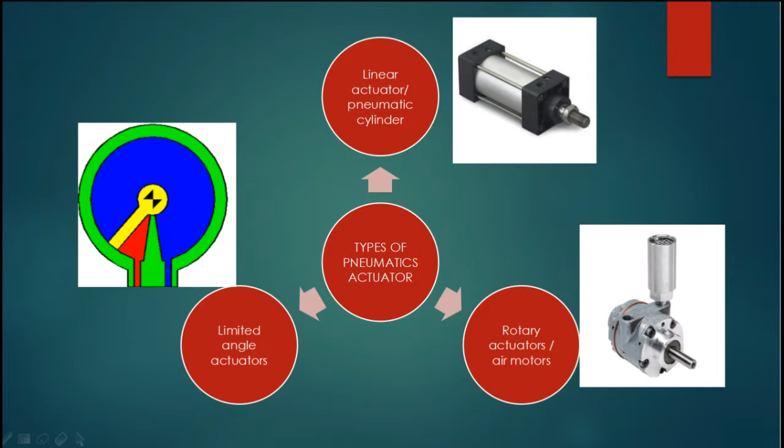Pneumatic actuators are devices used for converting pressure energy of compressed air into mechanical energy to perform useful work.

Type: linear actuator or pneumatic cylinder, based on first application. Number 1, light duty air cylinder. Number 2, medium duty air cylinder. Number 3, heavy duty air cylinder.

Second, cylinder action: number 1, single acting cylinder; number 2, double acting cylinder. Third, cylinder movement: number 1, rotating type air cylinder; number 2, non-rotating type air cylinder.

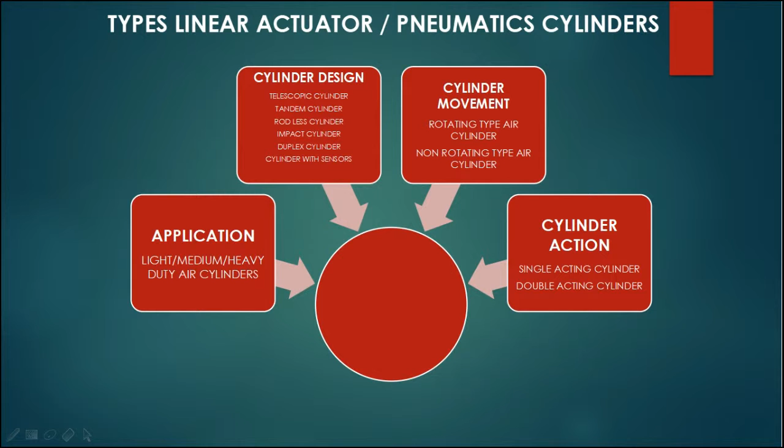And the last one, cylinder design: number 1, telescopic cylinder; number 2, tandem cylinder; number 3, rodless cylinder; number 4, impact cylinder; number 5, duplex cylinder; and the last one, cylinder with sensor.

Material of construction, type of cylinder: number 1, light duty; number 2, medium duty; number 3, heavy duty. Components.

Number 1, cylinder tube. Number 2, piston. Number 3, mounting brackets. Light duty for cylinder tube: hard drawn seamless aluminium or brass tube, plastic.

Medium duty for cylinder tube: hard drawn seamless brass tube, aluminium, brass, iron or steel casting. Heavy duty for cylinder tube: hard drawn seamless tubing, brass, bronze, iron or steel casting.

Light duty for piston: aluminium alloy casting, fabricated aluminium, brass, bronze. Medium duty for piston: aluminium alloy casting, brass, cast iron.

Heavy duty for piston: aluminium alloy casting, brass, cast iron.

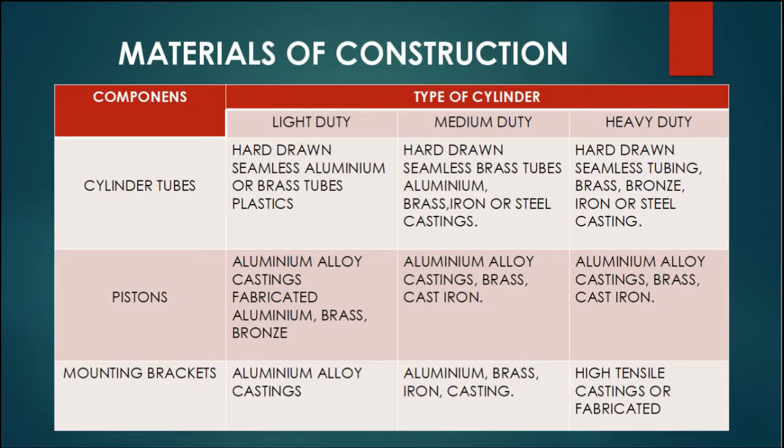Light duty for mounting brackets: aluminium alloy casting. Medium duty for mounting brackets: aluminium, brass, iron casting. Heavy duty for mounting brackets: high tensile casting or fabricated.

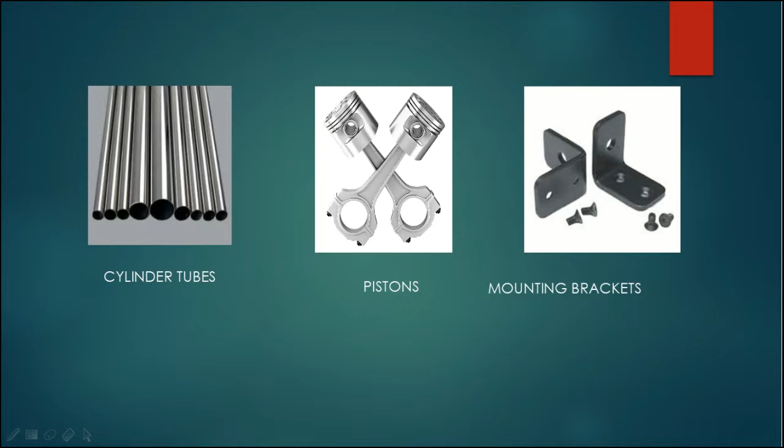Cylinder tube, piston, mounting bracket. Single acting cylinder.

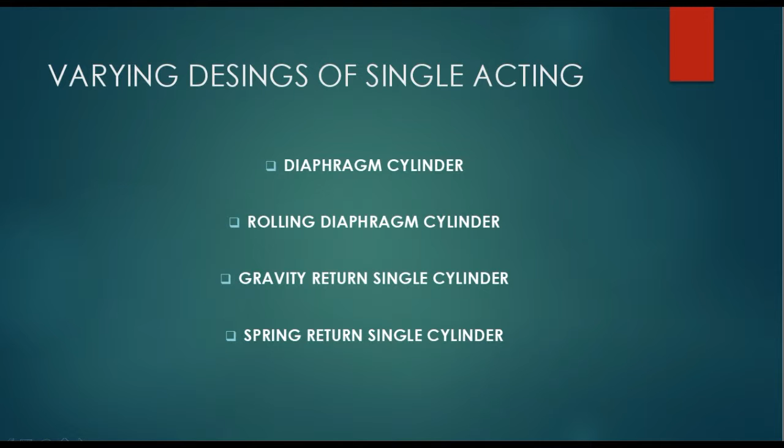Variant designs of single acting cylinder: first, diaphragm cylinder; second, rolling diaphragm cylinder; third, gravity return single cylinder; and the last one, spring return single cylinder.

Double acting cylinder is equipped with two working ports, on the piston side and the rod side. To extend the piston, compressed air is admitted on the piston side and the rod side is connected to the exhaust.

During retraction, air is admitted at the rod side while the piston side volume is connected to the exhaust. Force is exerted by the piston both during forward and return motion of the cylinder. It's available from few mm to around 300 mm, while stroke length up to 2 meters.

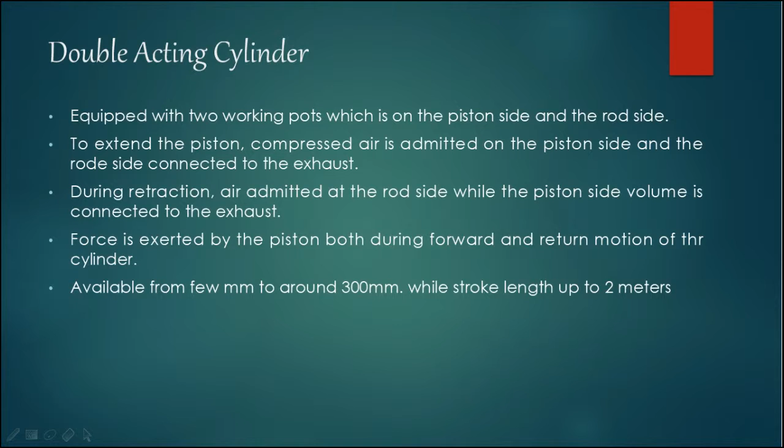Now, the construction of double acting cylinder. The 7 parts of the double acting cylinder are: first, base cap with the port connection; second, bearing cap with port connection; third, cylinder barrel; fourth, piston; fifth, piston rod; sixth, scraper ring.

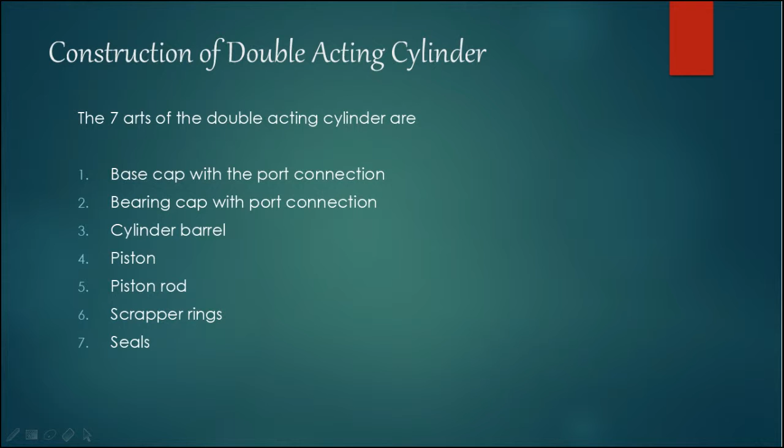And seventh, seals. The base cap and the bearing cap are made of cast material, aluminium or malleable cast iron, and can be fastened to the cylinder barrel by tie rods, threads or flange. The cylinder barrel is usually made of seamless drawn steel tube to increase the life of the sealing component.

The bearing surfaces of the cylinder are precision machined. Can be made of aluminium, brass or steel tube with hard chrome bearing surface. These are used where there is corrosive influence.

Piston rod made from heat-treated steel. Certain percentage of chrome protects against rusting. Seal provided between piston and barrel to avoid leakage. Sealing ring is fitted in the bearing cap to seal the piston rod. Bearing bush made from sintered bronze or plastic coated metal.

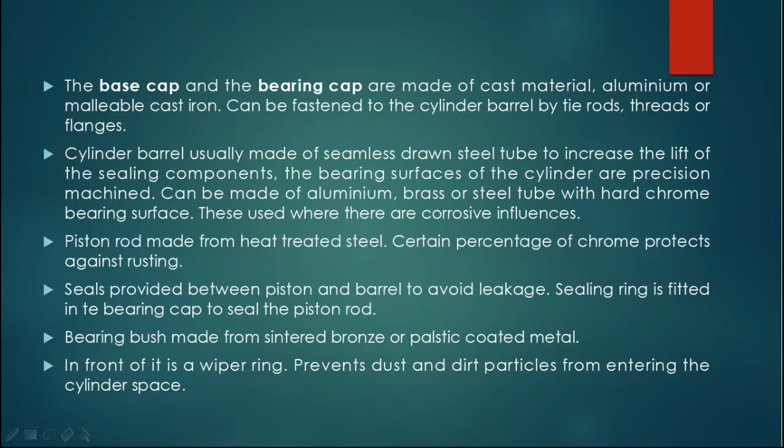In front of it is a wiper ring, which prevents dust and dirt particles from entering the cylinder space.

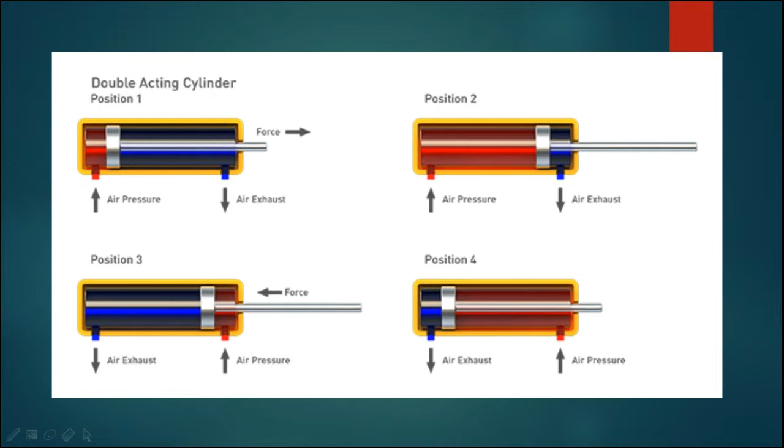Double acting cylinder with piston rod on one side. To extend the cylinder, pump flow goes to the blank port, and fluid from the rod end port returns to reservoir. To retract it, pump flow is sent to the rod end port, and fluid from the blank end port returns to the tank. Double acting cylinder with piston rod on both sides.

Rods extending from both sides can withstand higher loads because they have an extra bearing on each rod to withstand the load.

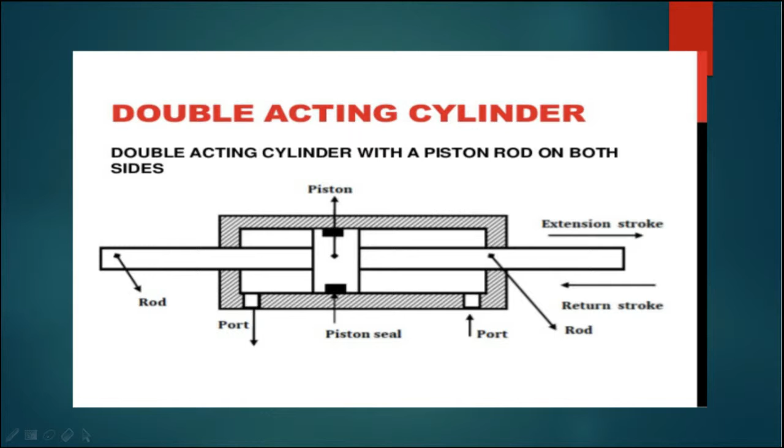Used when there is bending load and accurate alignment and maximum strength required. Precisely located, dispensing with external guides or bearings in many cases. Disadvantage is a reduction in maximum thrust due to the blanking effect of the rod cross-section on the piston area, and a slightly larger cylinder size is required.

Based on the cylinder action, the rotating type of cylinder is used in applications, but not widely used. Non-rotating types are widely used in industry.

Based on the cylinder design, industry has special designs of regular cylinders and special duty cylinders designed for special purposes. Special designs are basically natural variations of single or double acting cylinders, derived from standard production cylinders by merely exchanging selected parts. Special duty designs are for non-standard conditions of service or application. The following section deals with some commonly used special design and special duty cylinders.

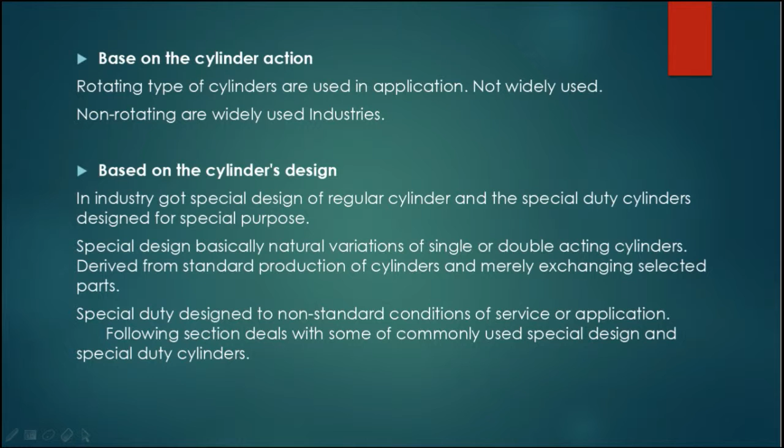Now, the telescopic cylinder. Used when long stroke length and short retracted length are required. The extension of the stroke.

When pressure is applied, air flows through port X and Y and pressure is applied on both sides of piston 1. Difference in area causes piston 1 to move to the right. Once inner piston 1 is fully extended, inner piston 3 extends.

Retraction stroke: to retract, air is applied to port B. Air pressure acts on the annulus of the inner piston 2 and moves it to the left. As the inner piston moves left and starts to close port X, air from port B goes to the annular side of piston 1 via port Y and pushes piston 1 to the left.

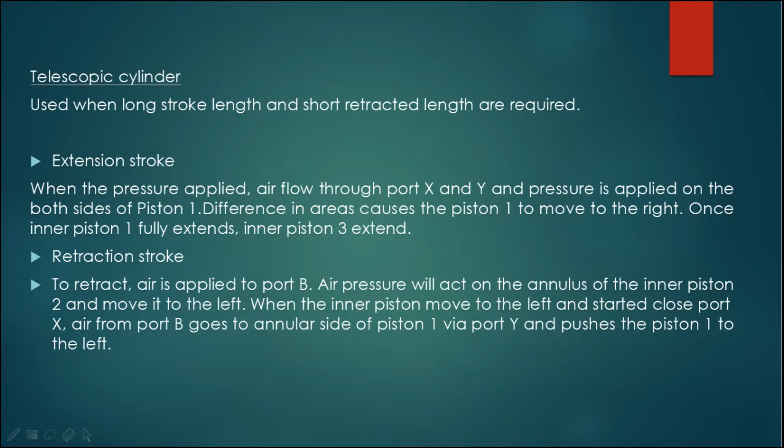Forward stroke. Pressurised air enters port P. The larger ram of diameter A moves first, since the diameter of ram A produces larger force at the beginning of the lift load. When ram A reaches the end of the stroke, ram B begins to move, providing smaller force.

When it reaches its end position, ram C will complete the stroke. Retraction stroke.

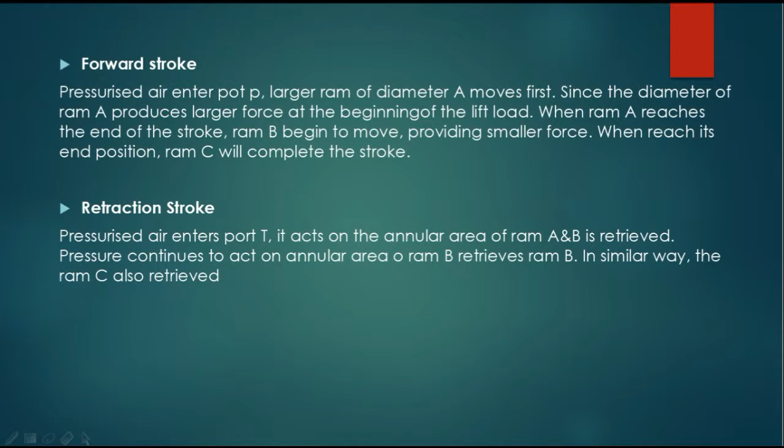Pressurised air enters port T. It acts on the annular area of ram A and B is retrieved. Pressure continues to act on the annular area of ram B, retrieving ram B. In a similar way, ram C is also retrieved.

Lastly, tandem cylinder: two separate double-acting air cylinders arranged in line in one cylinder body. Used in applications where a large amount of force is required.

Pressure is applied to both pistons, resulting in increased force because of the large area. The drawback is that the cylinder must be longer than a standard cylinder, with a larger flow rate than a standard cylinder, to achieve an equal speed.

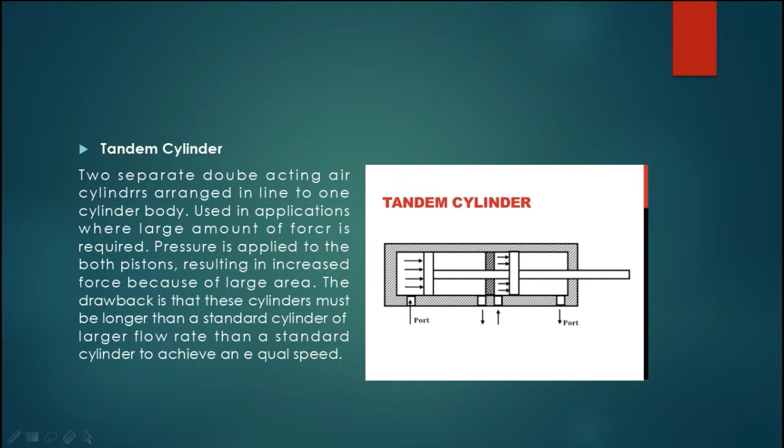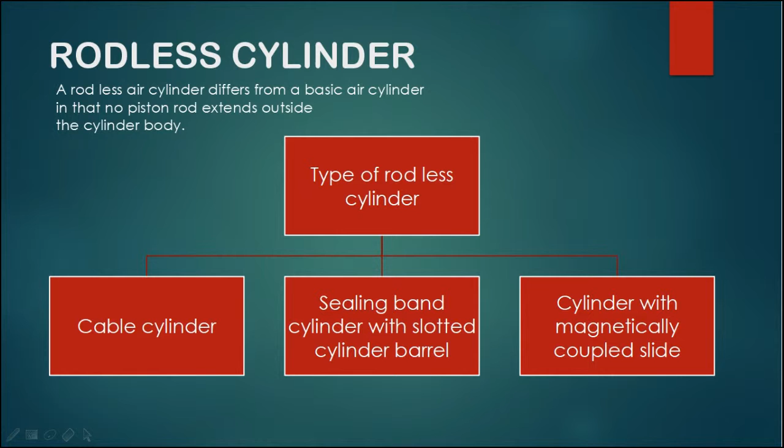A rodless air cylinder differs from a basic air cylinder in that no piston rod extends outside the cylinder body. There are three types of rodless cylinder: first, cable cylinder; second, sealing band cylinder with slotted cylinder barrel; and last, cylinder with magnetically coupled slide.

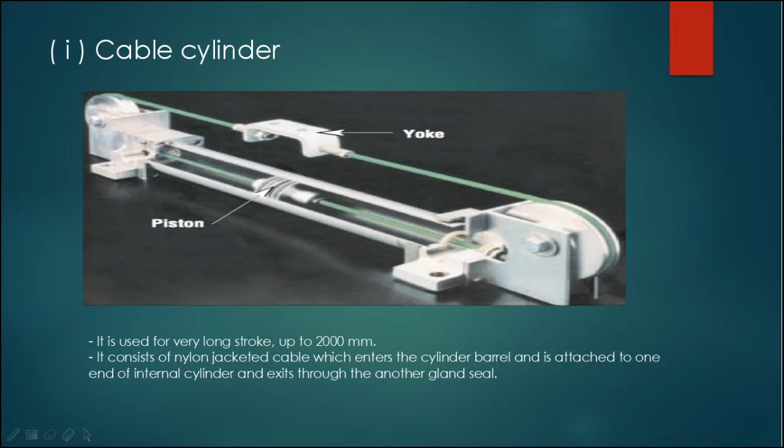Cable cylinder is used for very long strokes, up to 2000 mm. It consists of a nylon jacketed cable which enters the cylinder barrel and is attached to one end of the internal cylinder, exiting through another gland seal.

The second is sealing band cylinder with slotted cylinder barrel. As the carriage moves, the two band sealing strips are alternately opened in front and then closed behind the moving carriage, regardless of direction of travel. The seals on the piston inside the cylinder barrel press the inner band seal tight against the barrel of the cylinder, preventing air from leaking out.

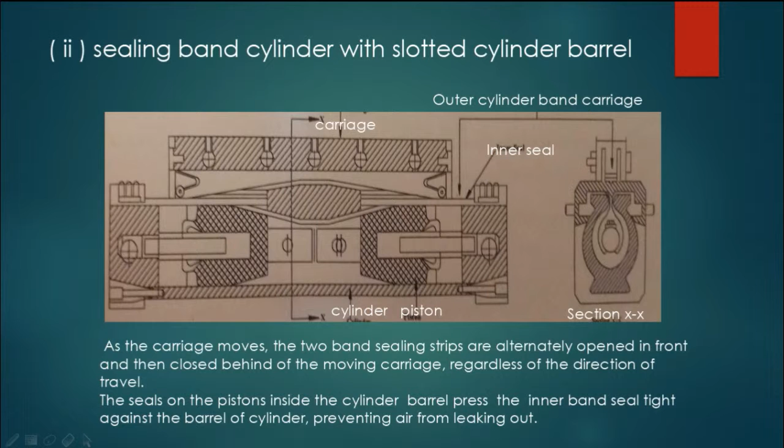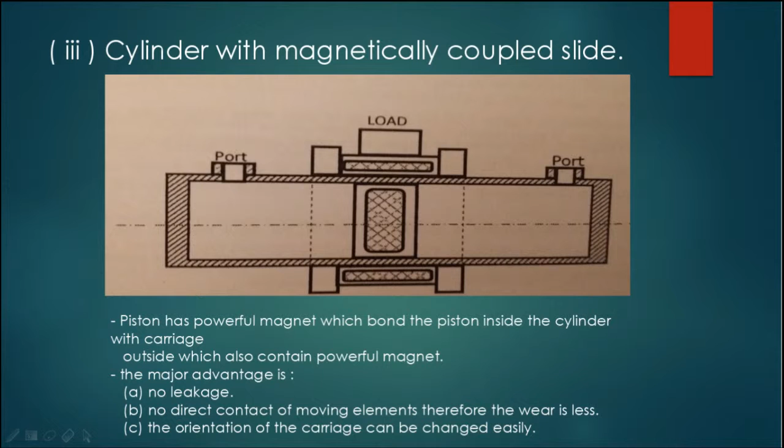The third is cylinder with magnetically coupled slide. The piston has a powerful magnet which bonds the piston inside the cylinder with the carriage outside, which also contains a powerful magnet. The major advantage is no leakage, no direct contact of moving elements, therefore the wear is less. The orientation of the carriage can be changed easily.

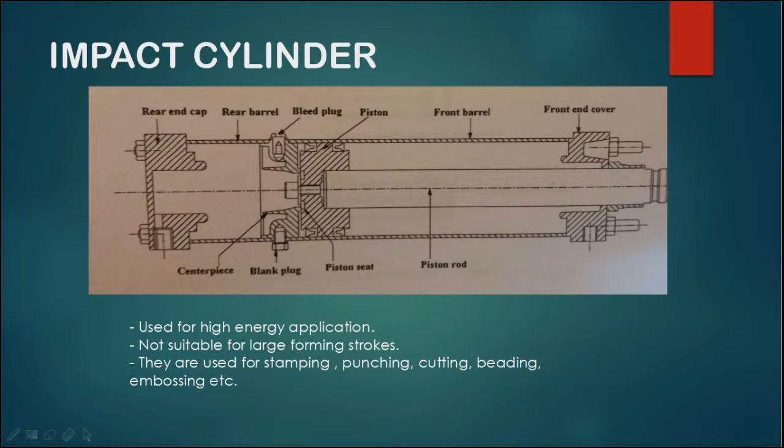Impact cylinder is used for high energy applications, not suitable for large forming strokes. It is used for stamping, punching, cutting, beading, and embossing.

Duplex cylinder, or opposite thrust, or multi-position cylinder. A duplex cylinder may be used for two-motion duties, for example, clamping a workpiece in position by the motion of one piston.

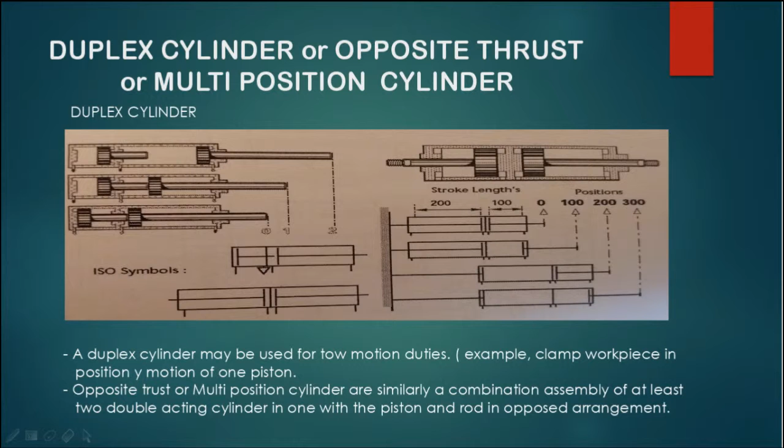Opposite thrust or multi-position cylinders are similarly a combination assembly of at least two double-acting cylinders in one, in which the piston and rod are in opposite arrangement.

Position sensor for cylinder. Magnetic trip switches are the traditional method for position sensing and are still widely used and reliable. Pressure threshold sensors respond less to actual position than to piston velocity, so they are only suitable for detecting the end of piston travel. Both of these are gradually being superseded by the two types of magnetic sensor.

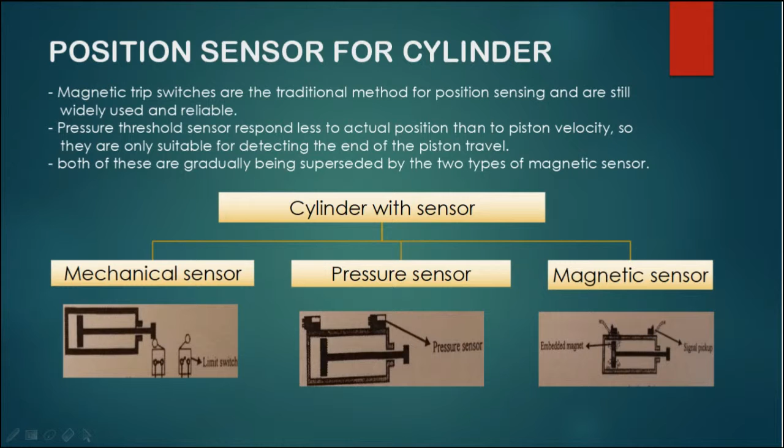There are three types of cylinder with sensor: first, mechanical sensor; second, pressure sensor; and the last, magnetic sensor.

This is the graphical symbol. First, single acting cylinder with unspecified return. Second, single acting cylinder with spring return. Third, double acting cylinder, single piston. Fourth, double acting cylinder, double piston rod. Fifth.

Telescopic cylinder, double acting. Sixth, telescopic cylinder, single acting. Seventh, double acting cylinder with variable cushion on one side, and the last is double acting cylinder with variable cushion on both sides.

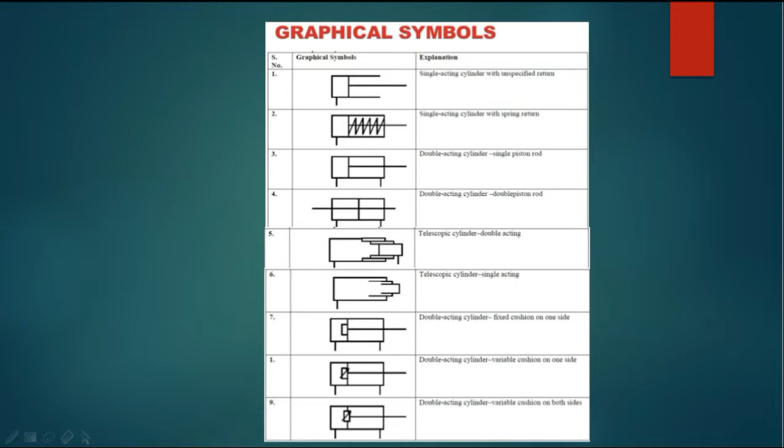Cylinder mounting influences stability, maintenance frequency, and success of the entire installation. Poor mounting design can cause excessive side loads and stresses, which will bring about early failure of some vital component. Selection of the mounting depends on the application and mounting configuration.

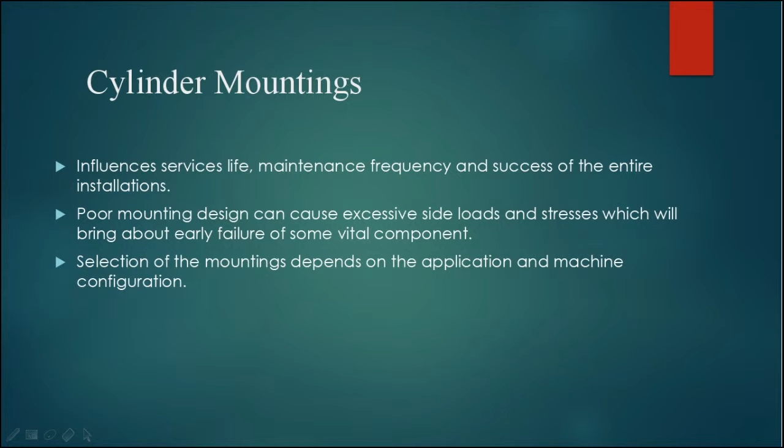There are three types of mounting. First, fixed centerline mounting. The cylinder is supported along its centerline. The mounting bolts are thus subject to shear or simple stress, and need correct alignment.

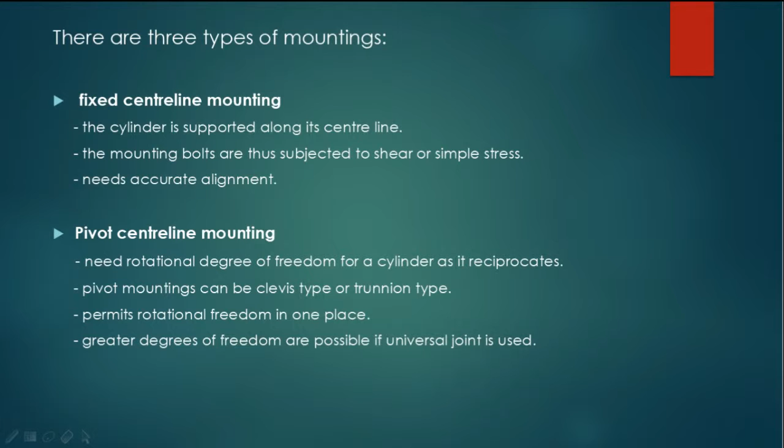Second, pivot centerline mounting, which needs rotational degree of freedom for a cylinder as it reciprocates. Pivot mounting can be clevis type or trunnion type, permitting rotational freedom in one plane. Greater degrees of freedom are possible if a universal joint is used.

Then, lastly, fixed non-centerline mounting. It introduces torque under load condition, which may rotate or bend about its mounting bolt when loaded. Stress level on the cylinder is higher as compared to centerline mounting.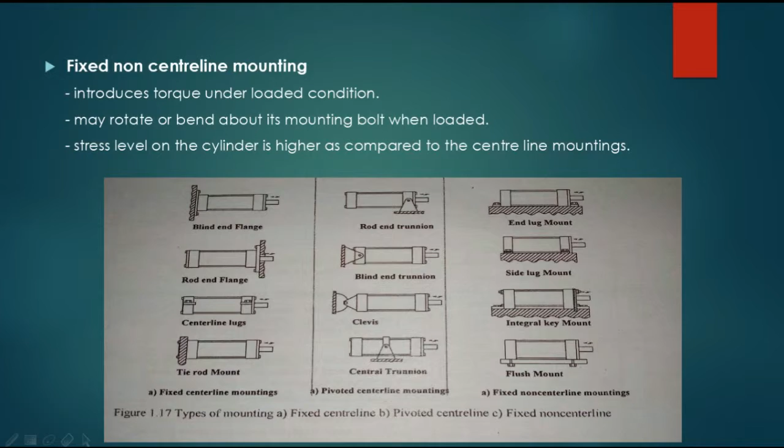Cylinder seal is used in cylinders to prevent losses caused by leakage and to make effective use of the compressed air energy medium. Important characteristics of this are long life, low friction, resistance to heat, stability of form, higher range of working pressure, higher range of temperature, and mechanical strength.

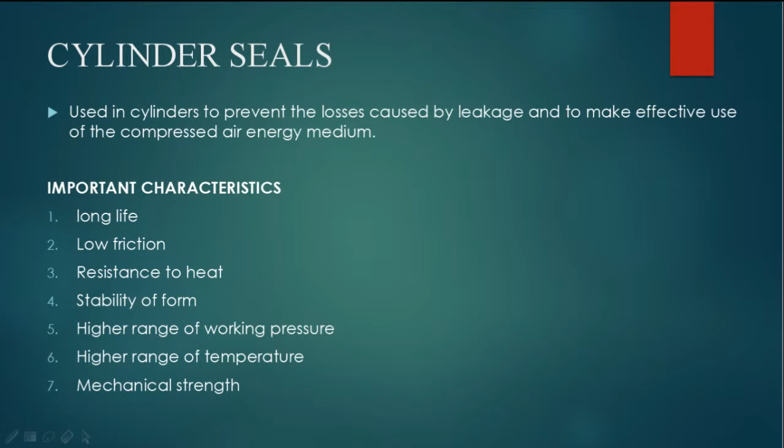Classification: first, static seal, used to provide sealing between the stationary parts of the cylinder, for example, end cap and barrel. Second, dynamic seal, used to provide for moving surfaces, with example cup seal and Z seal.

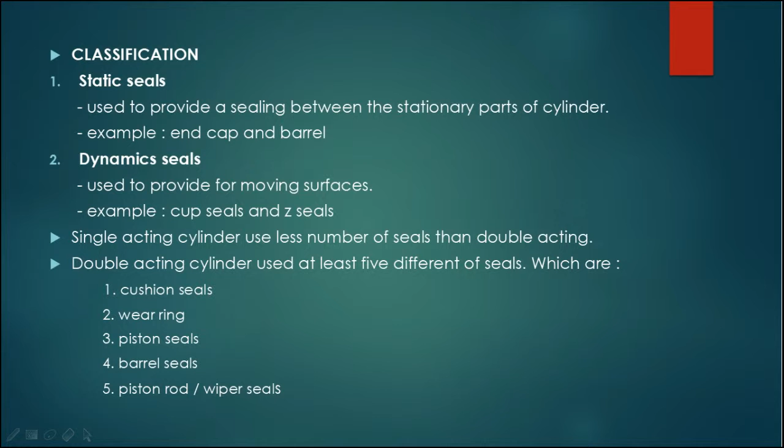Single acting cylinder uses fewer seals than double acting. Double acting cylinder uses at least five different seals, which are cushion seal, wear ring, piston seal, barrel seal, and piston rod seal.

Cushion seal protects a cylinder and its load by absorbing energy at the end of the stroke. When the piston moves to the left, the air in the left chamber must be exhausted to allow full travel of the piston.

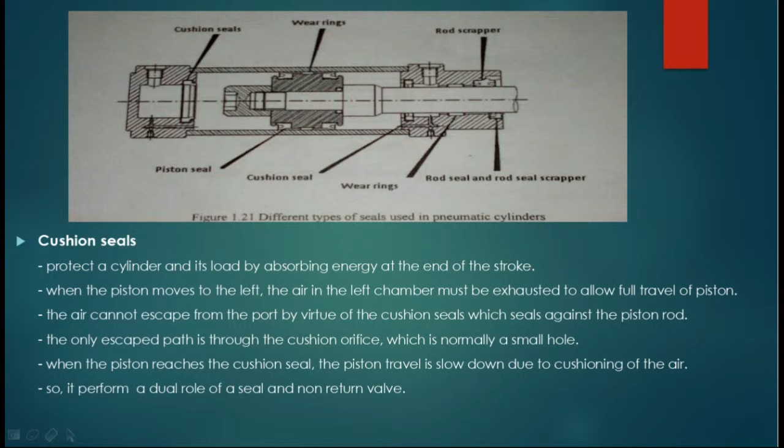The air cannot escape from the port by virtue of the cushion seal, which is sealed against the piston rod. The only escape path is through the cushion orifice, which is normally a small hole. When the piston reaches the cushion seal, the piston travel is slowed down by cushioning of the air, so it performs a dual role of a seal and non-return valve.

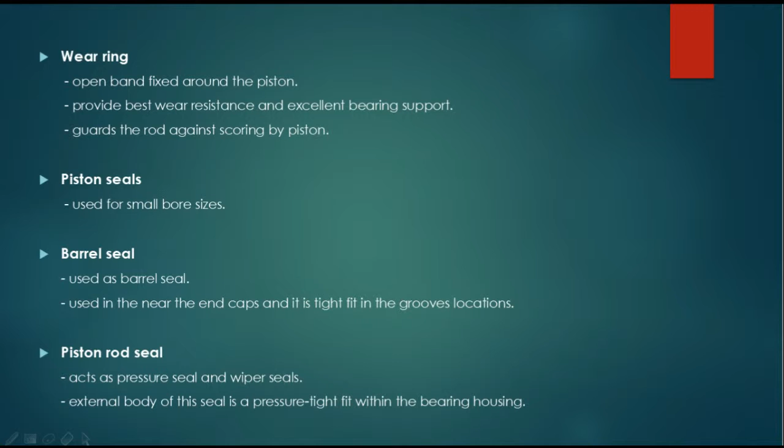Wear ring: open band fixed around the piston provides best wear resistance and excellent bearing support, guarding the rod against scoring by the piston. Piston seal is used for small bore size. Barrel seal is used near the end cap and is a tight fit in the groove location. Lastly, piston rod seal acts as pressure seal and wiper seal; the external body of this seal is a pressure tight fit within the bearing housing.

Cushioning in pneumatic cylinder: the capability of a cylinder to perform rapid reciprocating motion also supplies a disadvantage in that considerable kinetic energy is dissipated in the form of shock at the completion of the stroke.

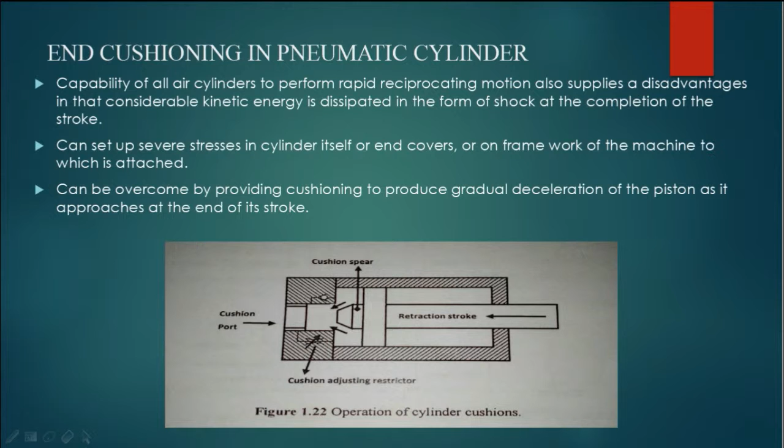This can set up severe stresses in the cylinder itself, the end cover, or on the framework of the machine to which it is attached. It can be overcome by providing cushioning to produce gradual deceleration of the piston as it approaches the end of its stroke.

Need for cushioning: when pressurized air is supplied at the inlet port of the cylinder, the piston accelerates and travels inside the cylinder. The piston has to be slowed down at the end of the stroke to prevent excessive impact on the end cap. Shock load arises not only from fluid pressure but also from the kinetic energy of the moving parts of the cylinder and loads; this can be reduced by decelerating the piston at the end of the stroke through cushioning.

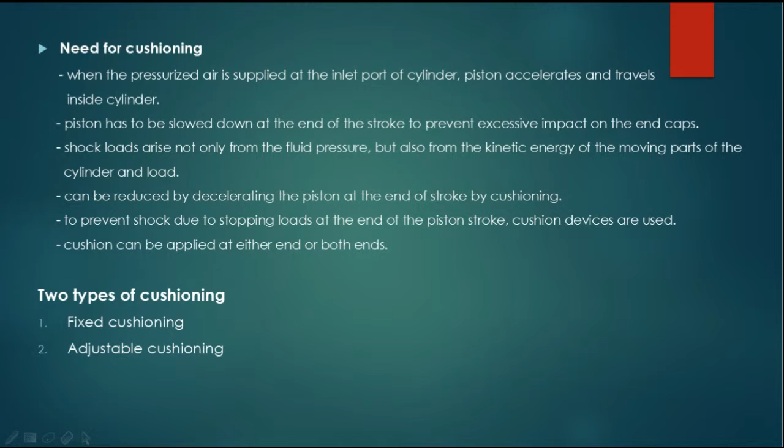To prevent shock due to stopping load at the end of the piston stroke, cushion devices are used. Cushioning can be applied at either end or both ends. There are two types of cushioning: fixed cushioning and adjustable cushioning. Fixed cushioning is used for small bore cylinders, where a shock absorbent disc placed into the end cover absorbs the impact of the piston.

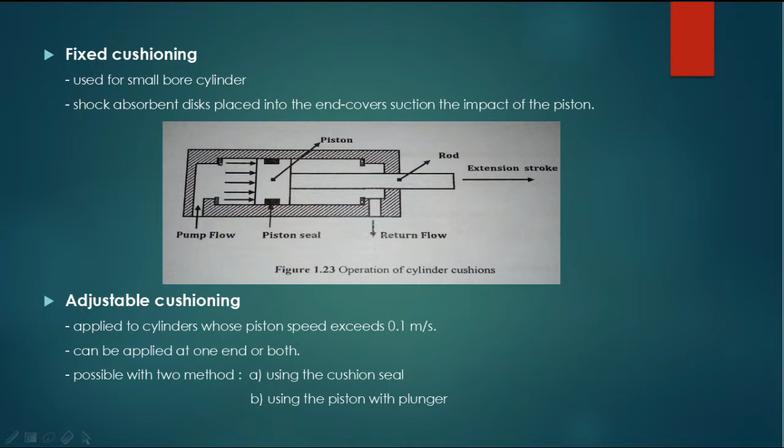Adjustable cushioning applies to cylinders whose piston speed exceeds 0.1 meter per second. It can be applied at one end or both. It is possible with two methods: using the cushion seal, and using the piston with plunger.

Using the piston with plunger and cap: in this type, exhaust is unrestricted until the plunger enters the cap. The exhaust flow is then routed through a deceleration valve which reduces the end-of-travel speed. The needle valve is adjustable to allow control of the deceleration rate.

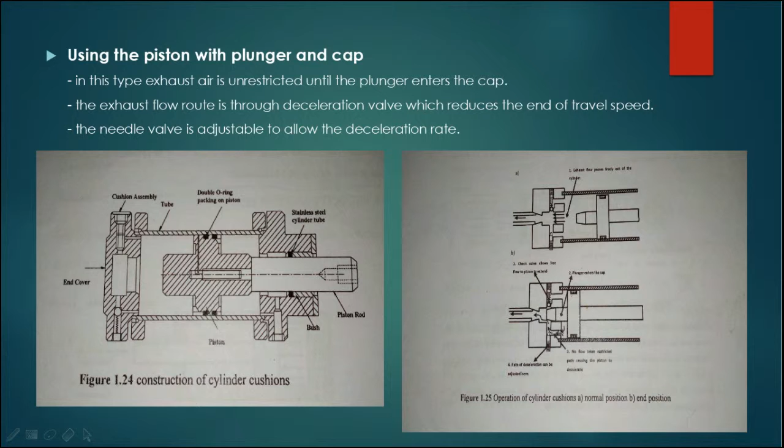Let's talk about rotary actuators. A rotary actuator is used to achieve angular motion. This device is designed to produce high torque and have limited rotary movement. Its standard rotation is 90 degrees, 180 degrees, and 270 degrees.

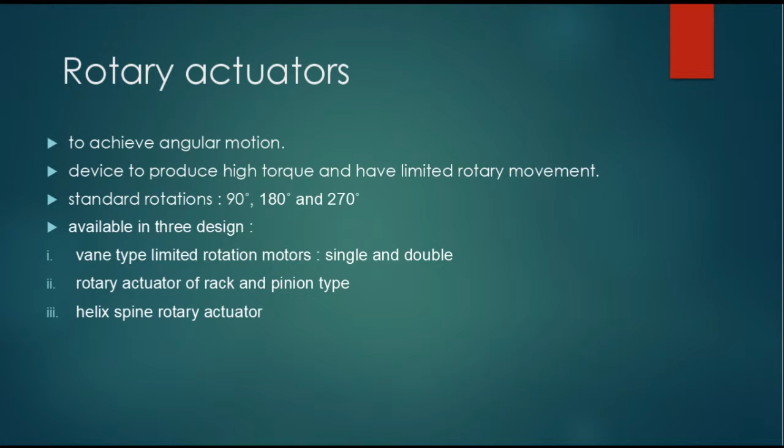Rotary actuators are available in three designs: vane type limited rotation motors, which come in single vane and double vane; second, rotary actuator of rack and pinion type; and third, helix spline rotary actuator.

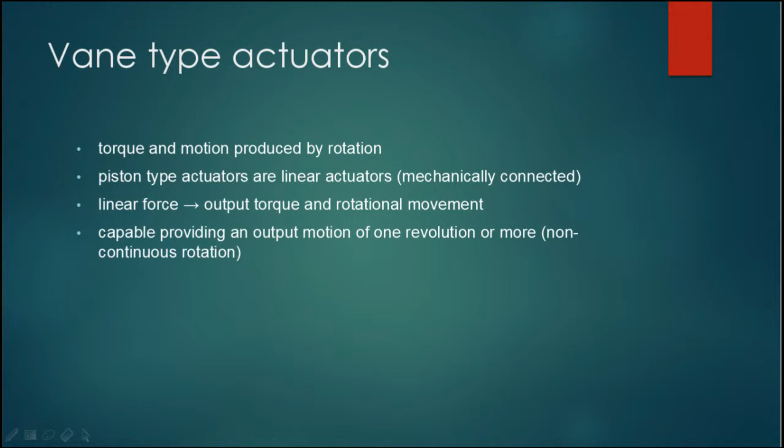Vane type actuators produce torque and motion through rotation. Piston type actuators are linear actuators that are mechanically connected, where the linear force from the actuator produces output torque and rotational movement. It is capable of providing an output motion of one revolution or more, but non-continuous rotation.

Vane type actuator: single vane and double vane. For the single vane, it consists of a cylindrical housing that houses the central shaft where the vane is attached, and a shoe or stopper fixed to the internal diameter, dividing it into two chambers. Pressure air passes through port A, rotating the vane clockwise, while air in the other chamber moves out through port B. When the vane rotates anti-clockwise, air moves through port A while air pressure acts on port B.

For the double vane, two vanes are fixed to the output shaft 180 degrees apart, with two fixed stoppers, providing two separate operating halves with two chambers. This gives twice the maximum torque of a single vane device at the same pressure. The maximum angle of rotation is reduced by the stopper to only 100 degrees.

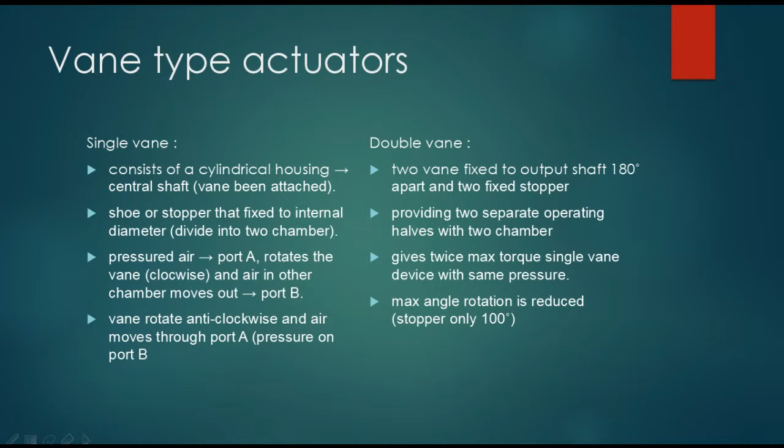For the rotary actuator of rack and pinion type, it has high torque and a small installation footprint. For the double piston, it transmits turning moment to the output shaft. The toothed piston rod acts with the output shaft in a rack and pinion arrangement, giving an even turning moment in rotational movement.

There are keyways on the output end shaft, while the opposite end of the shaft has a stub used to accommodate end position indication or facilitate hand operation of the actuator. The turning limit of the rotary actuator is determined by an external stop lugs that is used to protect the unit from the effect of excessive inertia.

The compressed air is fed into the piston chamber through connecting plates and drilled galleries located in the central part and end cover. The rotary actuator has a cylinder block of natural anodized aluminium with end covers of black anodized aluminium.

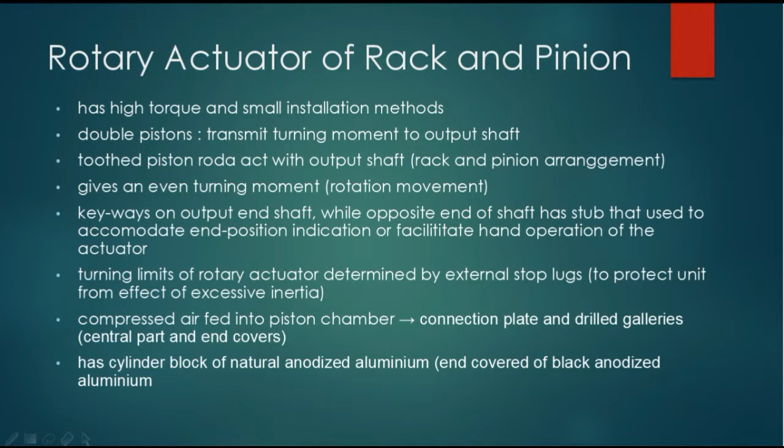Now the helix spline rotary actuator has a keyed non-rotating piston with a hollow rod. The hollow rod has a set of internal spiral grooves that mesh with a spiral shaft. The spiral grooved shaft has rotational movement and extends through the housing as an output shaft. The output shaft turns clockwise as fluid is piped through the CW port, while the output shaft turns counterclockwise when fluid is piped to the CCW port.